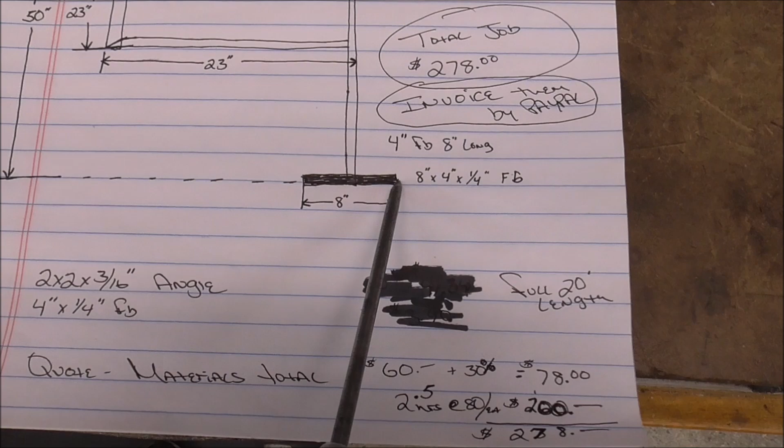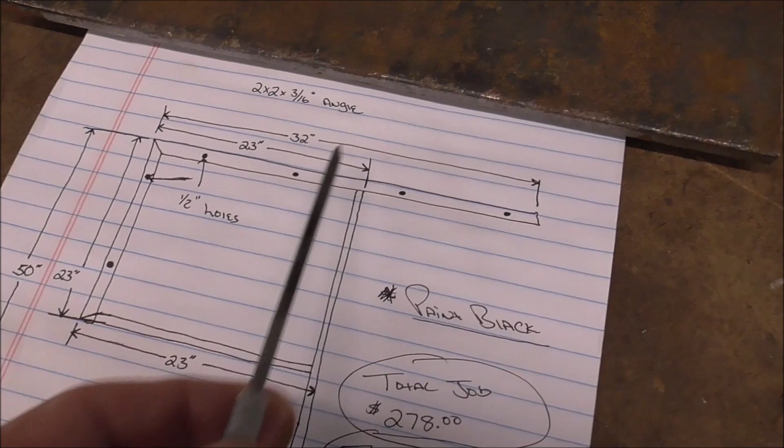So I ended up picking up a drop. We're going to end up plasma cutting this into a piece of 4x8 flat bar. And we're also going to have to bore some 1/2-inch holes along this and along this leg here, because this bracket is getting bolted to a block wall as well as this. Then when we're all done, we're going to just spray it with a coat of black paint.

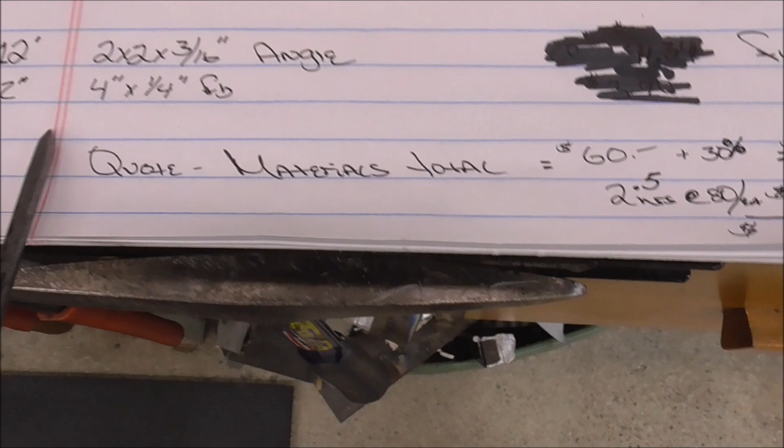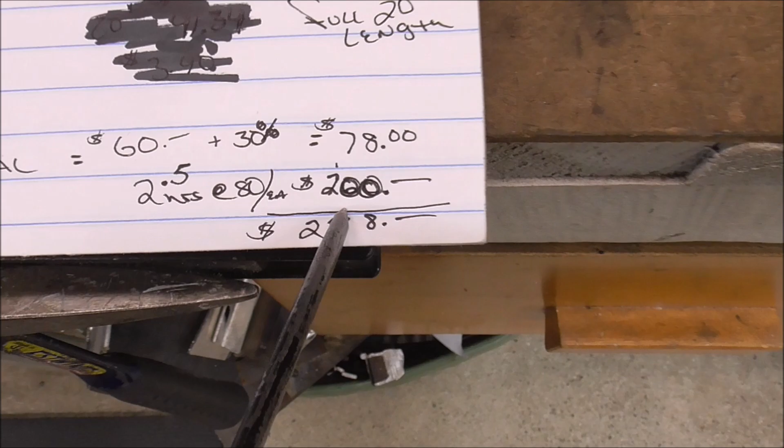Here's the breakdown, here's the quote of materials. Materials cost me $60. I marked them up 30% because I went and picked them up, so the material total was $78. I've got 2.5 hours of labor at $80 an hour, that's $200 in labor. Total project, $278.

And I made a note: my customer asked if I have PayPal, which I do, and I will invoice them through PayPal.

I love to share the inner working parts of the business aspect end of it for you guys, because it gives you guys an idea of maybe what you can charge, because a lot of you watching this may be considering picking up side jobs or maybe even starting your own business. A pretty typical MIG welding labor rate for a self-employed person in our area would be about $80 an hour.

That's a reasonable charge for the market for the area that I'm in. I charge $80 an hour labor for just general welding and fabrication. Other things cost more, like if I'm doing something specialty for someone, like repairing cast iron, or TIG welding, that costs more because it's more intricate, more involved, more tedious work. But for general welding and general fabrication, I charge $80 an hour.

I also have a labor rate that I charge by the inch for weld and per cut. That comes into play at different times. Continue to watch this channel and you'll see when I incorporate those strategies in. But this is just some basic fabrication, pretty simple. We'll be able to bust this out pretty quick and get this customer back in business.

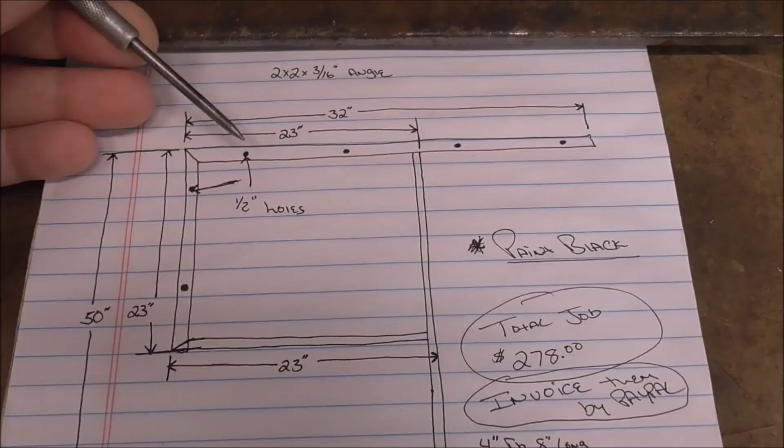So the first thing I'm going to do is start getting my cut list together of the things that I need to cut. I'm also going to have some 1/2-inch holes, 4 of them, in this leg, which is a 32-inch leg. I need to drill my holes. It's going to make things a lot easier if I drill my holes before I start welding this frame up.

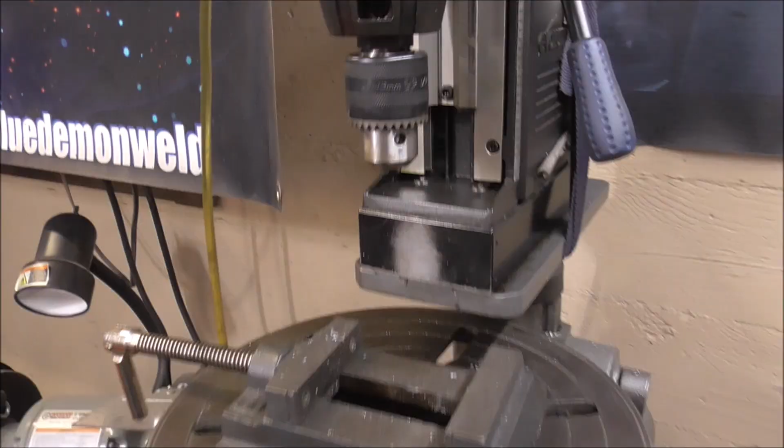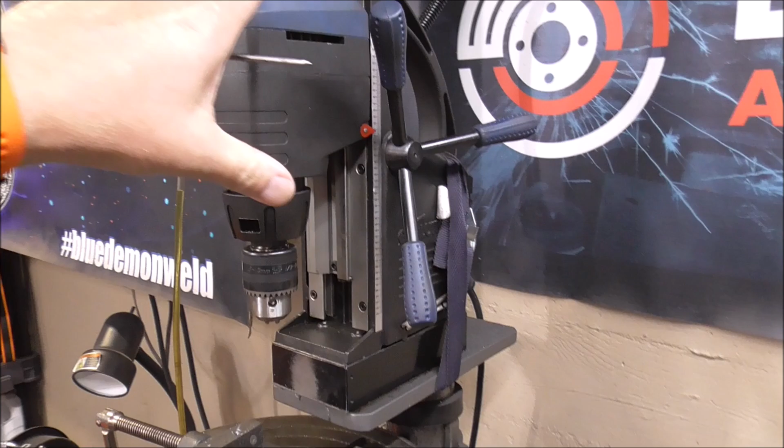And to drill these holes, I'm going to be doing this on my mag drill that I built. If you guys haven't seen this build, it's awesome. I picked this whole base up. Everything you see here in this stand, which is all adjustable through this crank, I paid $35 for this because it actually had a regular drill head on the top of it, but the motor was blown and everything was all clapped out and super loose.

So what I ended up doing is modifying this column and welding this steel plate to it. Now I just take my mag drill, set that on there, and turn on the magnet on the back. It magnetizes itself to this, and now I've got an adjustable drill press stand, and when I don't want to use it as a drill press, I can just carry it to the job site and use it like a regular mag drill. So I get double duty use out of this tool, so it's awesome.

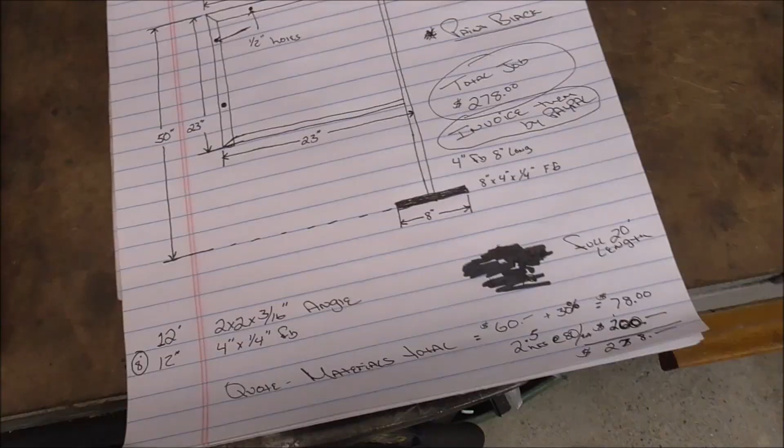I've got a set of annular cutters that I use with this, and it just makes hole drilling so much easier. It goes super fast. So what I'm going to do is I'm going to start cutting some of the pieces up.

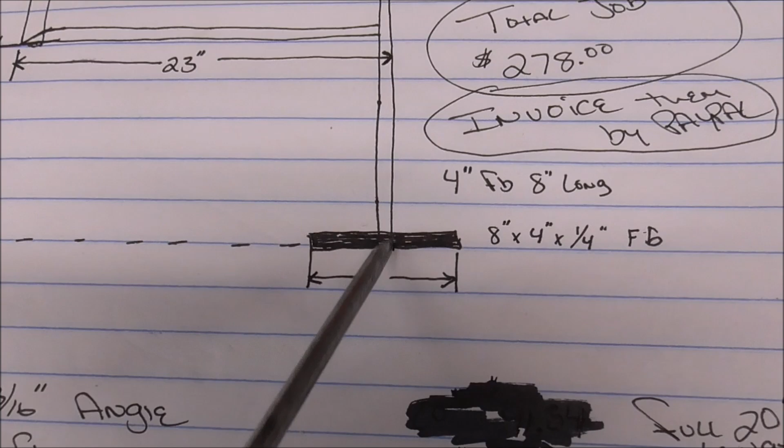Now if you look at these measurements, you can see I got a 50-inch piece. That is from the outside edge of this angle to the face of this plate. So this piece of angle right here really isn't 50 inches long, it's 50 to the plate. So I got to subtract the plate thickness, 1/4 inch there, then I've got to subtract the 3/16 thickness of the angle on this side.

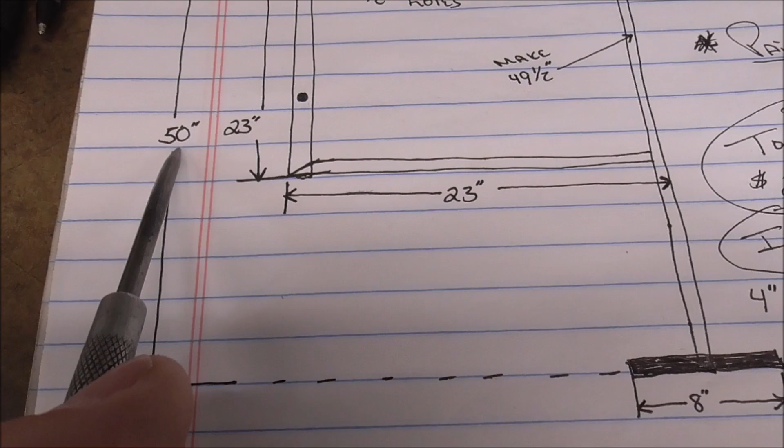So we're going to be subtracting 3/16 plus 1/4, and that'll be the length of this angle. This piece right here that's marked as 50 inches long to the face, I actually need to make that piece 49.5 inches long so that it finishes out to 50 inches when I'm done.

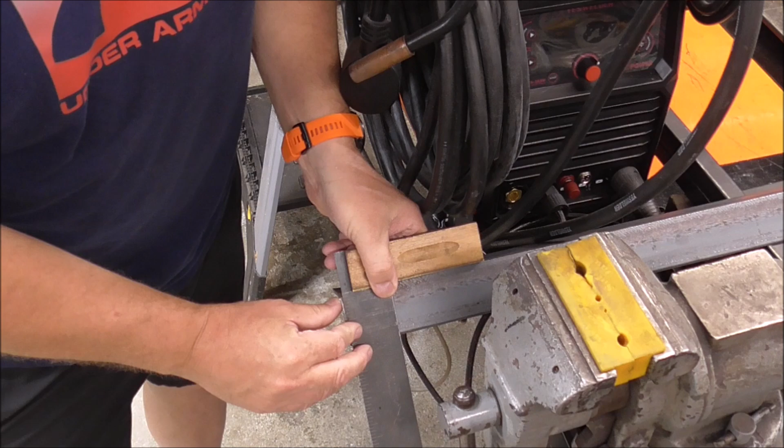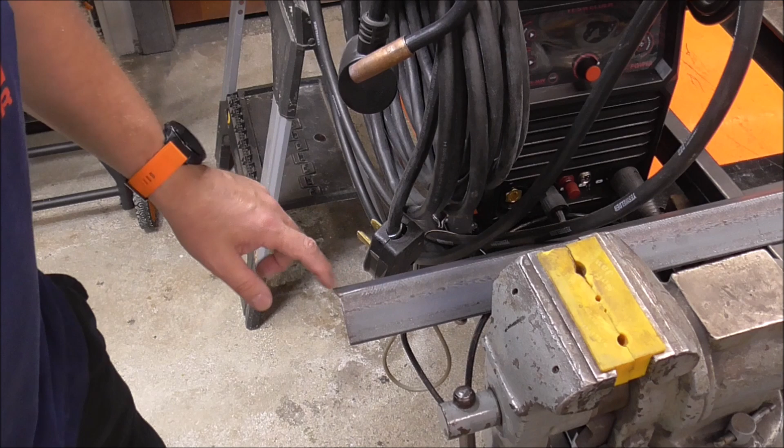One of the first things I like to do, guys, is check and verify to make sure that the side I'm going to keep, that the cut from the factory is actually straight, and it is, because there'll be times when it's not, and if this isn't straight, it's going to mess up your overall measurement. So if this is the piece you're going to keep, you should always get into the habit of checking to make sure that cut is straight. Just don't take it for granted that it is.

So I'll get a nice crisp mark on here, and we can get this cut at 49.5.

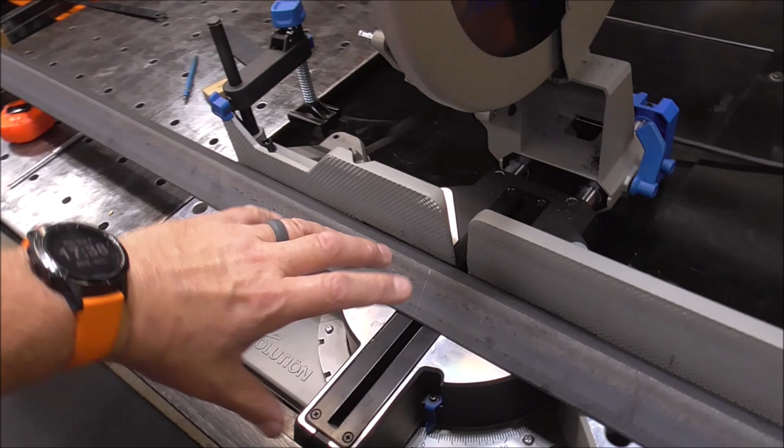This saw is going to be the perfect tool for cutting these pieces. This is the Evolution 355 MCS, and it is a chop saw that cuts both ways up to like 47 degrees. This thing is awesome, and we're going to need that feature for this because we're going to be picture framing the corners on this angle.

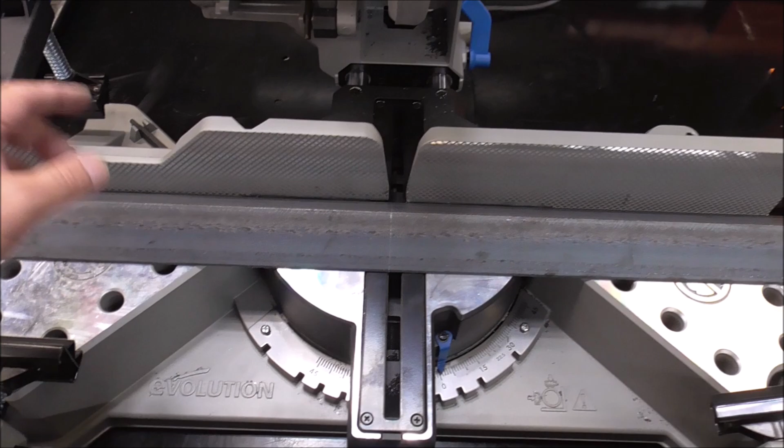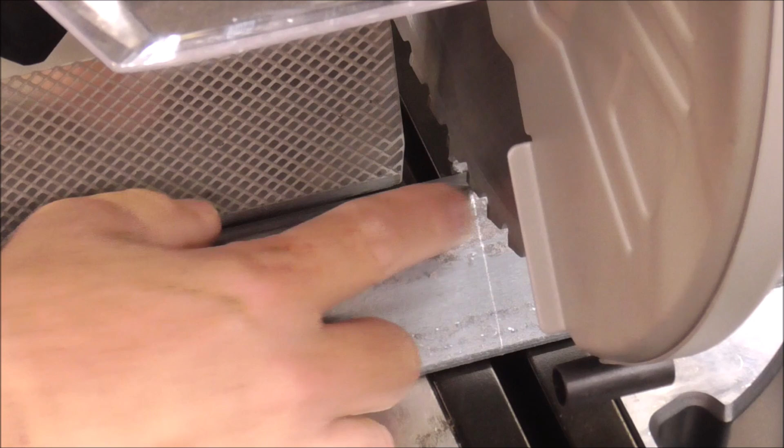What I mean by picture framing is these corners are going to be mitered here and here. So this is the side we're keeping, this is the scrap. I need to set my saw blade up accordingly, and make sure the saw is cutting the blade to the right side of the line and not this side, because this is the side I want to keep. That's the scrap.

These saws are loud, so you want to make sure you've got hearing protection and eye protection.

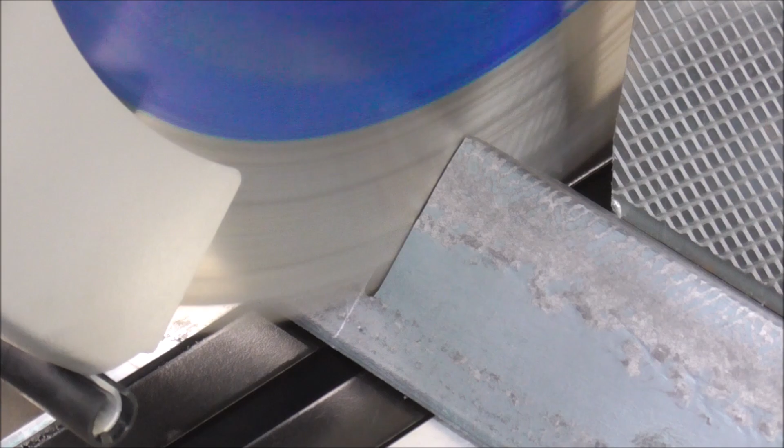49.5. Perfect. We just finished cutting this piece.

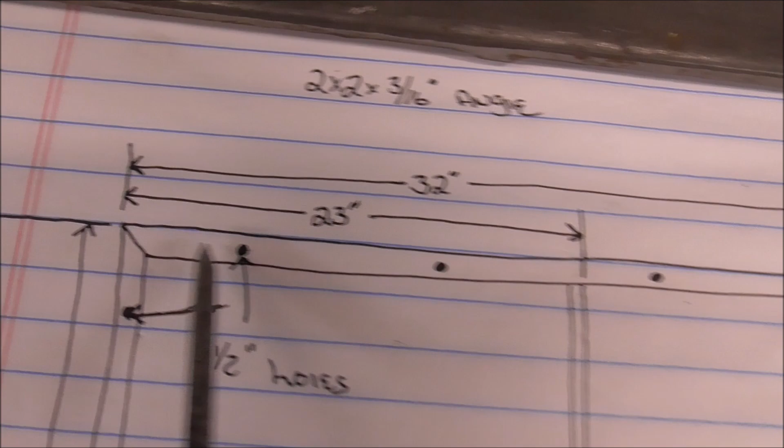Now the next piece we're going to cut is this one right here, which is 32 inches long. And that's 32 inches from the outside point of that miter to the end. So we're going to cut the miter first, then we'll make it 32 inches long.

And that's what's so great about this saw. You just loosen this up, turn your saw to 45 degrees, and it locks right in positively right there. We'll put the stop down on the material just like this, lock it down, put another one here to lock it positively against the fence. And there we go.

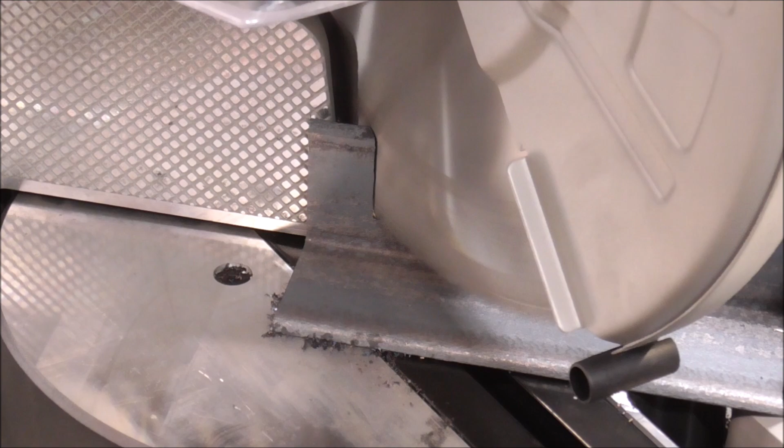Now if you just want to check to verify that that is spot on, you just take a framing square. Boom, look at that. Perfect 45.

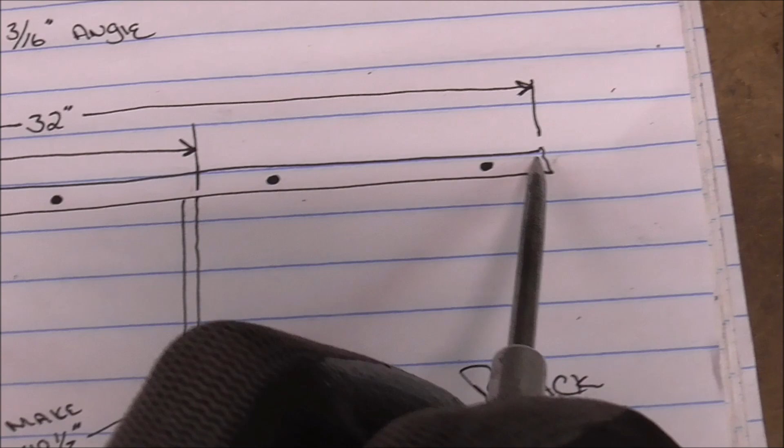We said we needed to make this piece 32 inches long to that long point right there. So here's the long point right here. We just need to measure back 32 inches.

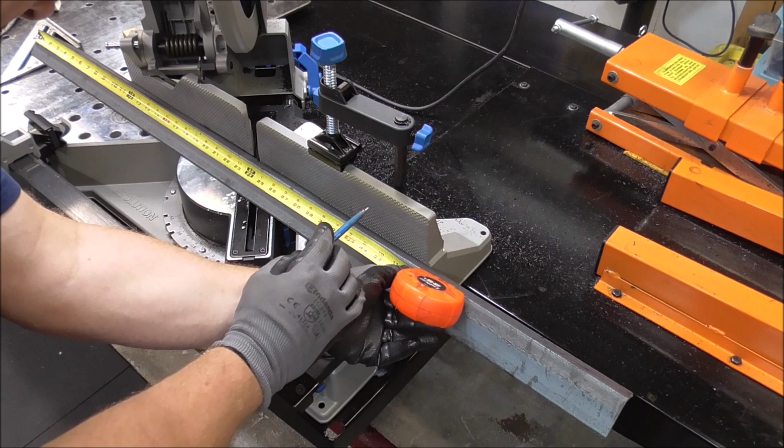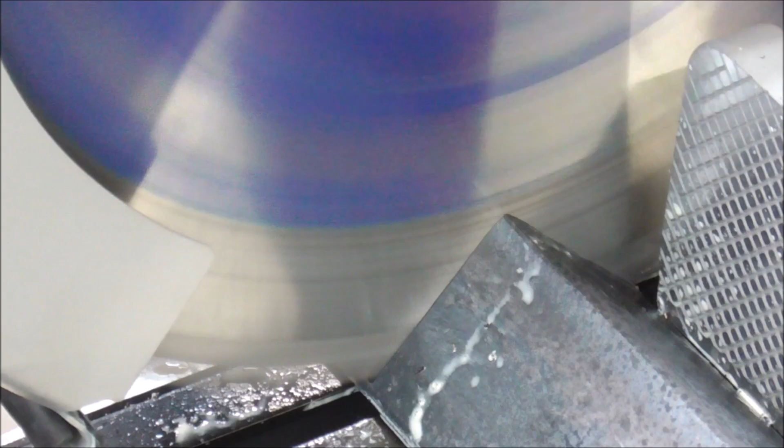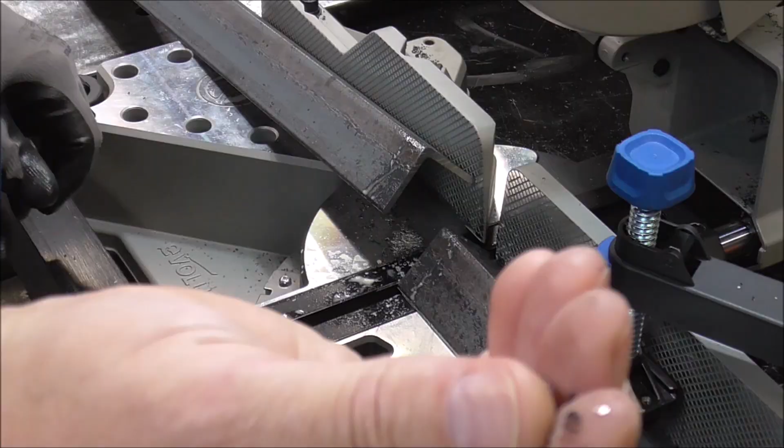And the great thing about this, guys, is that this cut has no heat in it. It's burr free, super clean and accurate, and it doesn't leave sparks all through your shop that can burn your shop down like a regular abrasive wheel can. These are the chips that it creates, just little small pieces of metal.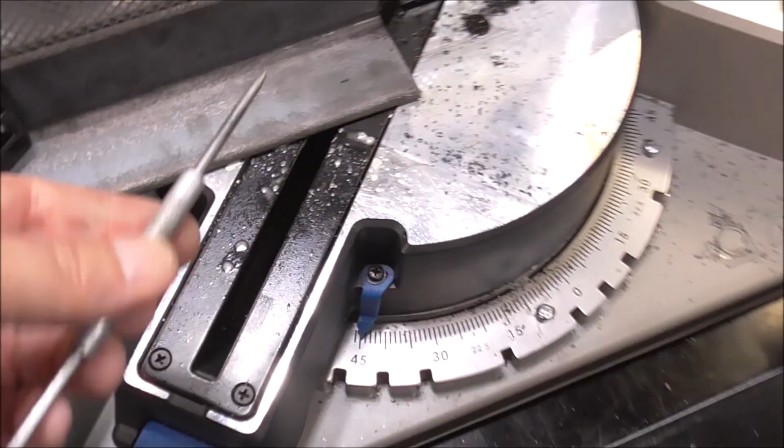The next piece I gotta cut is this one right here. This is gonna have a mitered cut here and a mitered cut here. So now we've got our saw set this way so we can make a miter in this direction. Then we'll measure back 23 inches and do a miter in the other direction.

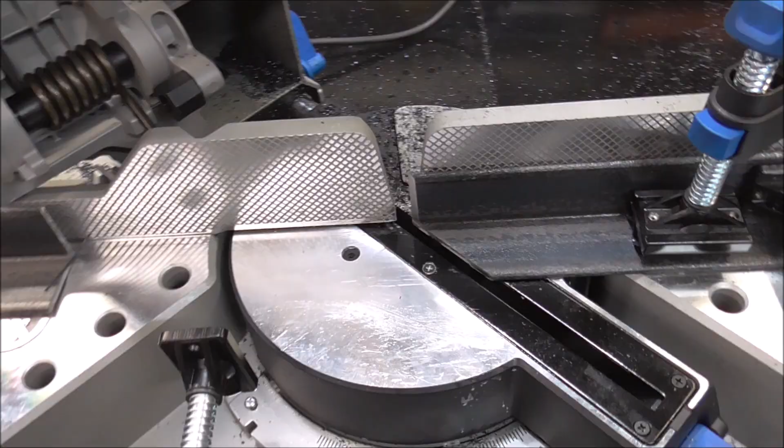I had a little issue here with this part of the saw contacting the height of this angle, so I had to cut it off at 23 inches and then make the 45 cut, but that wasn't a big deal. Like I said, that's resolved if you just cut it off square, then make your 45.

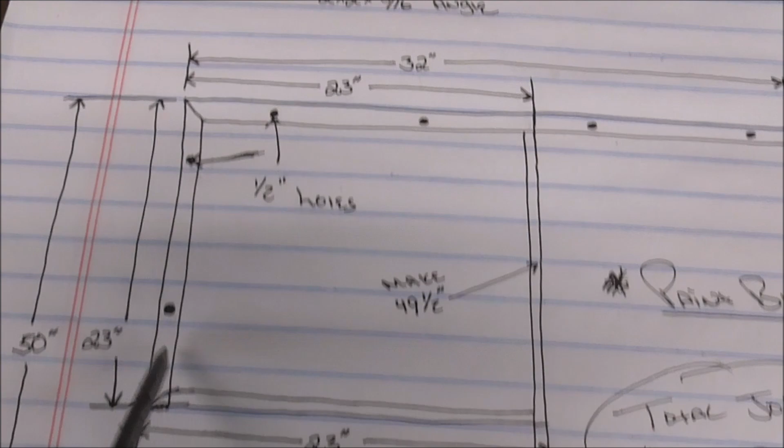From the outside edge of this angle to the outside edge of this frame, you can see that's 23 inches, outside to outside. So outside to outside needs to be 23 inches as well on this side. That means we've got to make this 3/16 of an inch shorter because that's the thickness of this angle. So it's going to be 22 and 13/16.

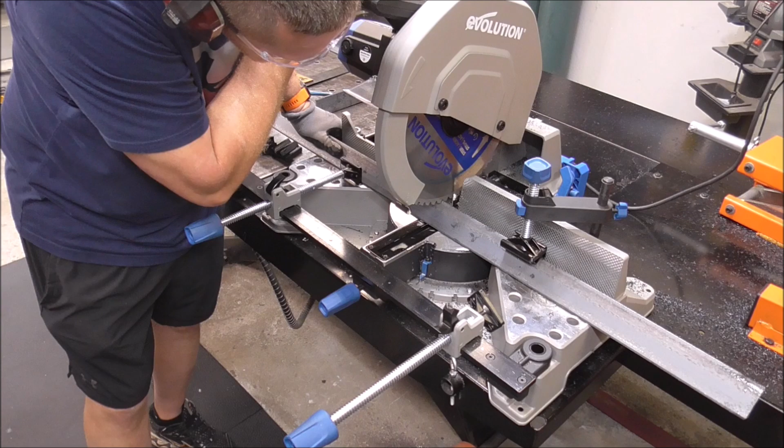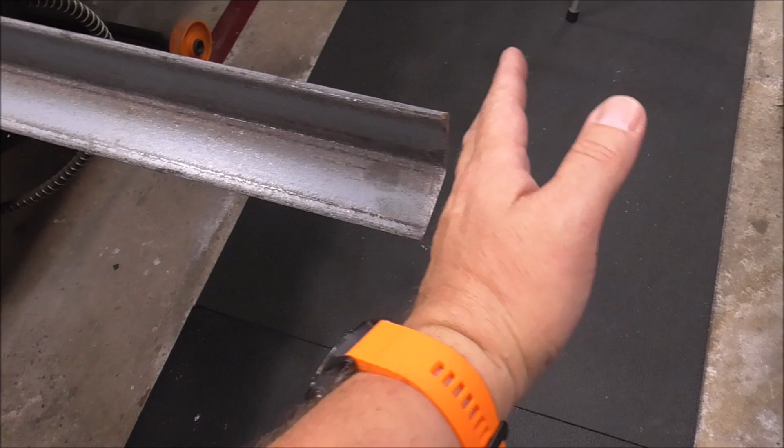So the rough shape is all made now. This is where the plate is going to be on the end, the 4-inch flat bar. But now we've got to do some coping cuts.

We've got to cope out this, you can see right there, so that this sits flat right here. That means we've got to take out this piece of the web here, and come up 3/16 and across this right here so that it sits flush. And we've got to do the same thing on this side over here.

And we can do this with the bandsaw. I think that's probably going to give us the cleanest cut. And that's as simple as just butting that up there and putting a line right on the metal. Right there, so I just put a straight edge on it.

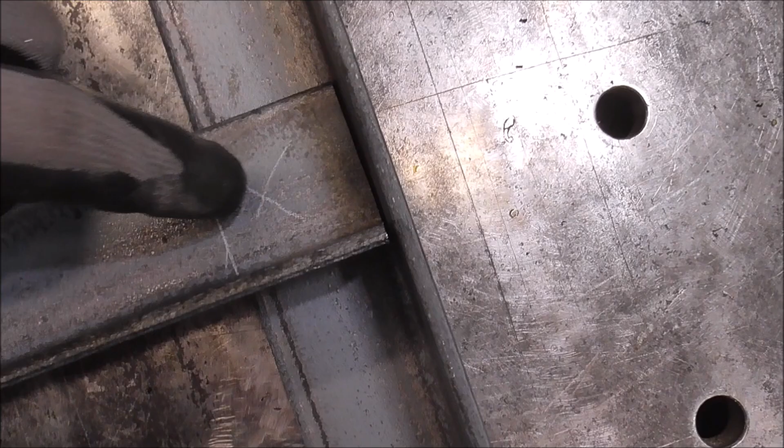So that's what we got to cut out, right where that X is. And then we got to cut across there a little bit. Piece of cake. So to cut along this, which is 3/16, we're just going to turn this up on edge.

Just like this, and cut to the end of that line. Now I'm using my portable bandsaw stand that I made for this saw. Super easy. If you have a portable bandsaw, you really should invest in building one of these stands because you will get so much more use out of your portable bandsaw. I use this all the time.

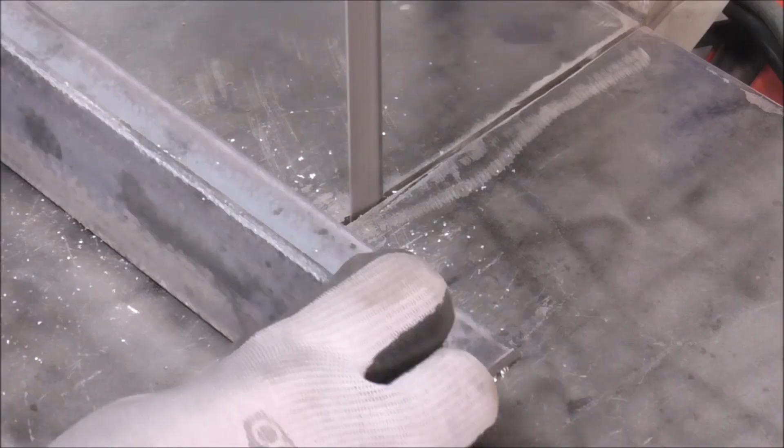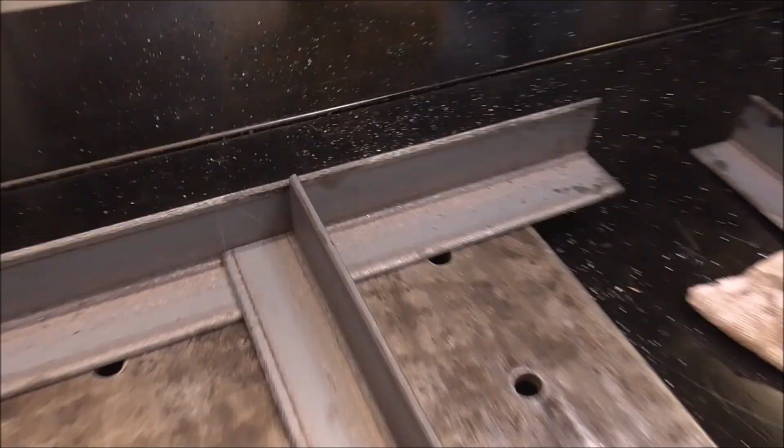And that's a coped cut right there. You can see how nice that fits now, all around there, all around there. Gives me a lot of area to weld, like all along there, all along there, all up there. Same thing on this side, here, over, and I could even bevel it out and do the bottom side as well.

So now we just gotta cope out this joint here. Just put a little mark right about there. Carry that across and cope that joint out.

I've laid this out all along the length and made marks fairly equal distance that'll work out good for drilling the holes to secure this to the wall. I've center punched this one right here so that I could bolt my drill vise to this table, and then I can just slide it along the length of it and it'll put the holes perfectly in alignment.

This is a 1/4 inch bit. This is going to be for my pilot, and then we're going to go with a 1/2 inch. I thought I had a 1/2 inch annular cutter. The smallest annular cutter I have is 9/16.

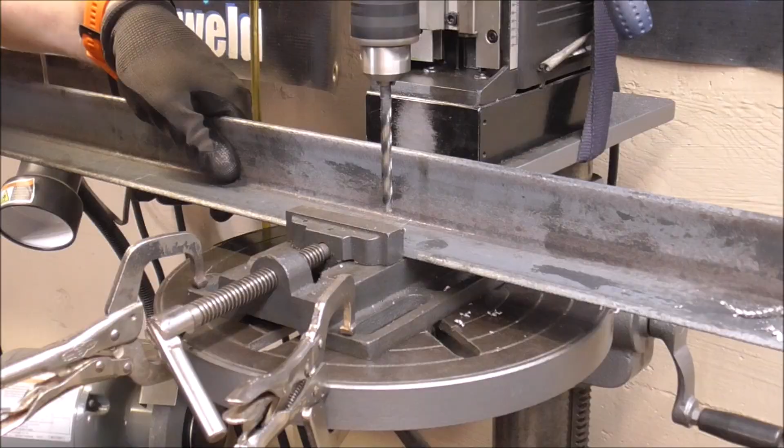Now I've got a 1/2 inch drill bit chucked up, and we'll just drill down through our pilot hole that we just previously drilled.

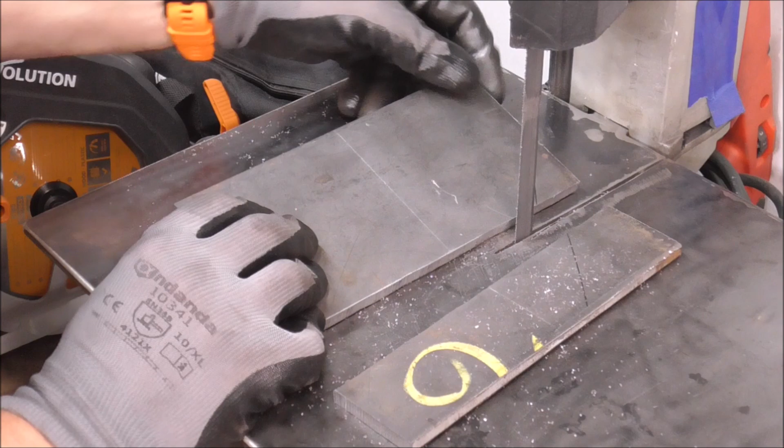I was going to use a plasma cutter, but I figured rather than set up a brand new tool, this is right here, might as well use this. So now this is 4 inches by 8 inches, all set to go.

Now I'm going to work on my joint prep. So wherever there's a weld to be made, I'm going to bevel it back, get everything all cleaned up, get all the mill scale off it, so we got a nice, good, solid connection.

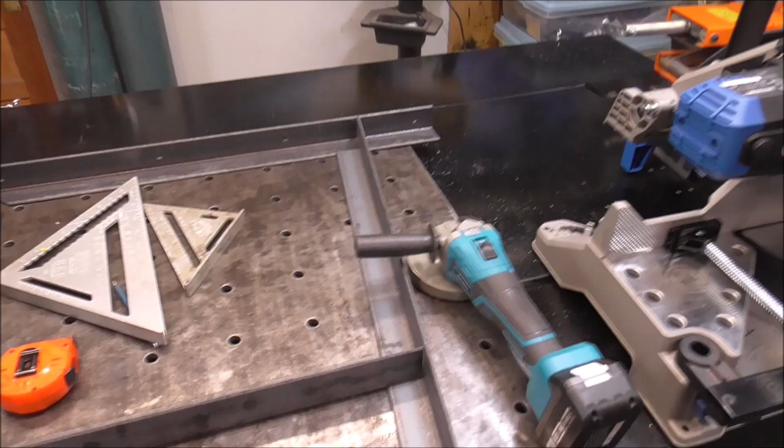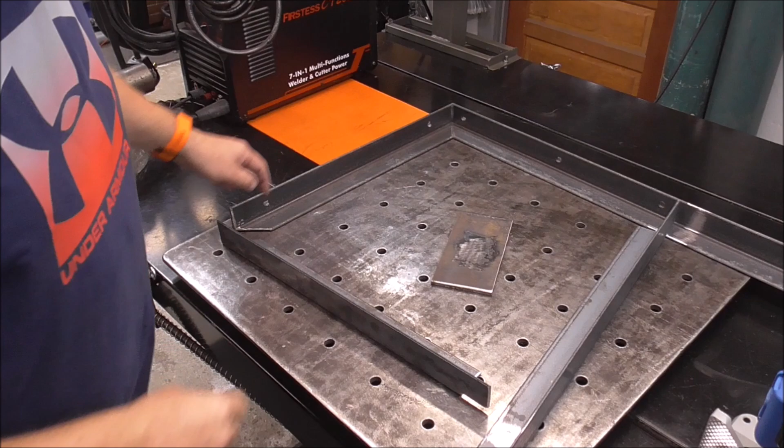Now that I've got all the edges prepped, guys, you can just see kind of here what I've done. I've kind of beveled everything, cleaned it up, got rid of the mill scale.

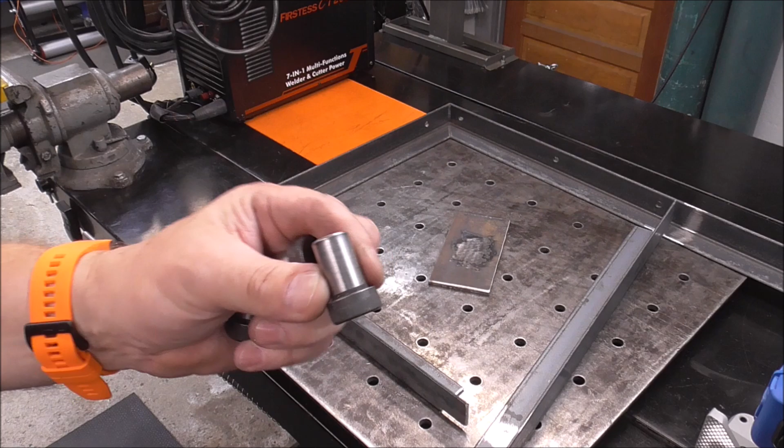Now I can start fixturing all this up, and it makes it really easy with this table. I built this fabrication table. These are some shoulder bolts that help align everything and make everything square.

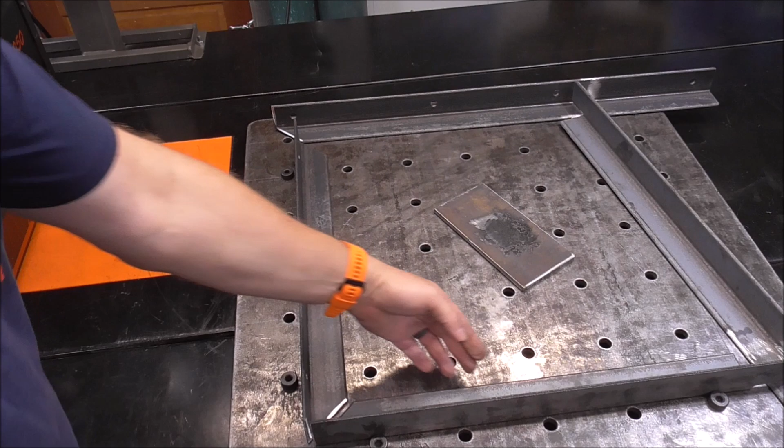So all I do for this is just drop some of these pins down inside the table. So that makes a straight edge here. Do the same thing over on this side. They fit really tight down in these holes like this. And now with this pushed up against these, this pushed up against these, that makes for a perfect 90-degree corner.

I just clamp this down, tack this up, and then go all the way around, make a complete square, and then this is perfectly level, flat, and square. It just makes layout and setup so easy. Then just throw a couple clamps on it. Also, I made these as well.

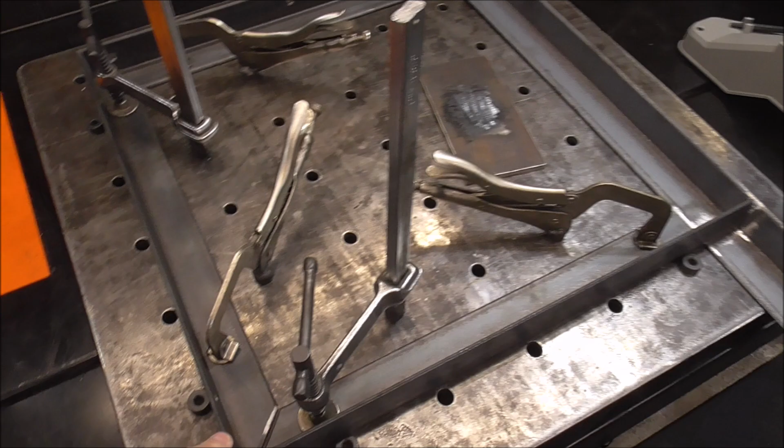The next thing we want to do is start welding this out. Now, if I was outside or on a job site, the perfect process for this would be to stick weld it. We're not on a job site, we're inside in a controlled environment, so that makes this a perfect job for MIG welding with C25 gas.

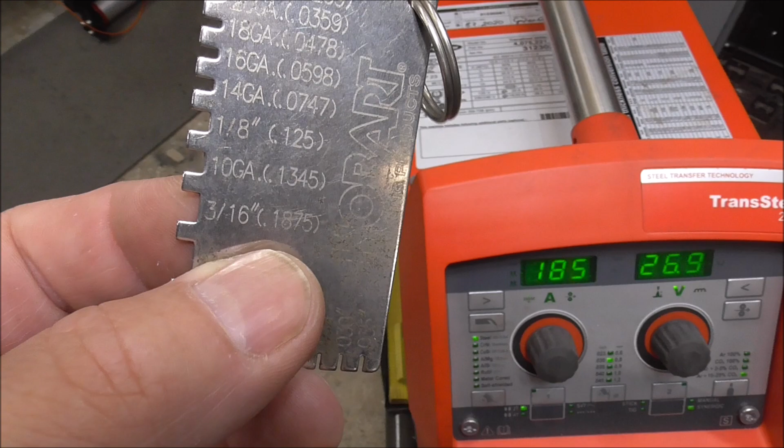I'll take a minute to go over the setup. I'm using my Fronius Transsteel 2200. For wire, I'm using Lincoln 30 thousandths. I'm using C25 gas. So if we look at our material thickness gauge here, it says that 3/16 material is 0.187 thousandths. So we go to our machine and we're set on material thickness.

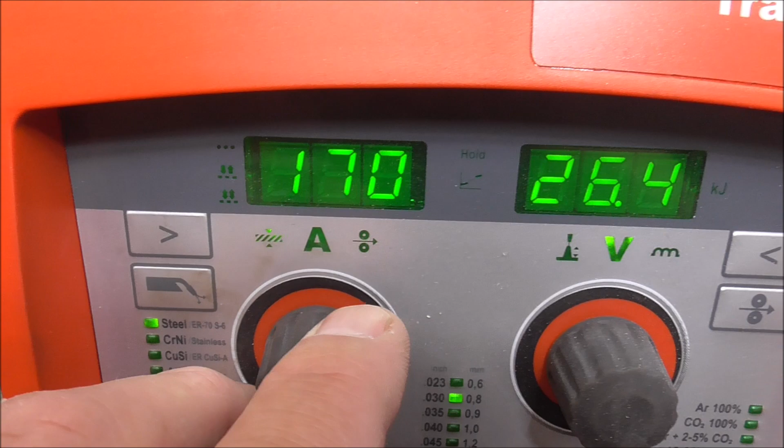So we can go to 185. The next one up is 190. So we'll go 185. We're on steel. We can purge out the line and also see what we're running for CFH.

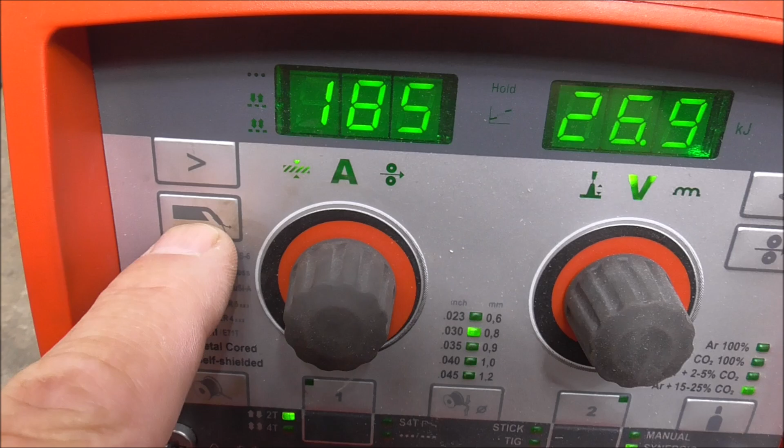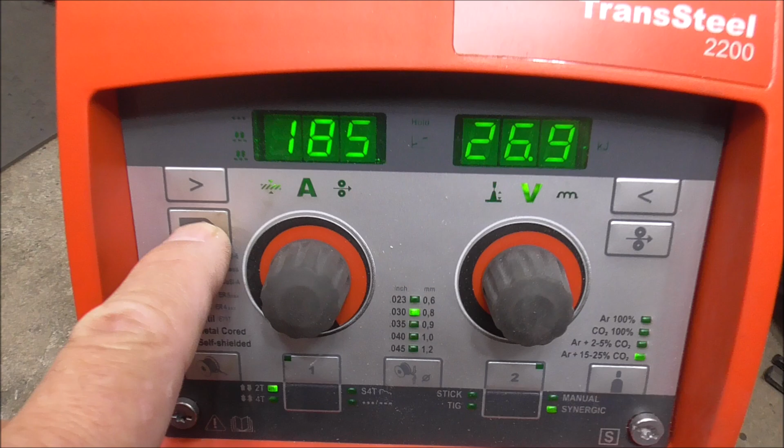So that purges out the gas in the whip, and that lets me know I'm running about 18 CFH. Press it again, that turns it off. You can see we're set for 30 thousandths, C25 gas, and that works out to be 26.9 volts. So we're all set up with this machine to start welding.

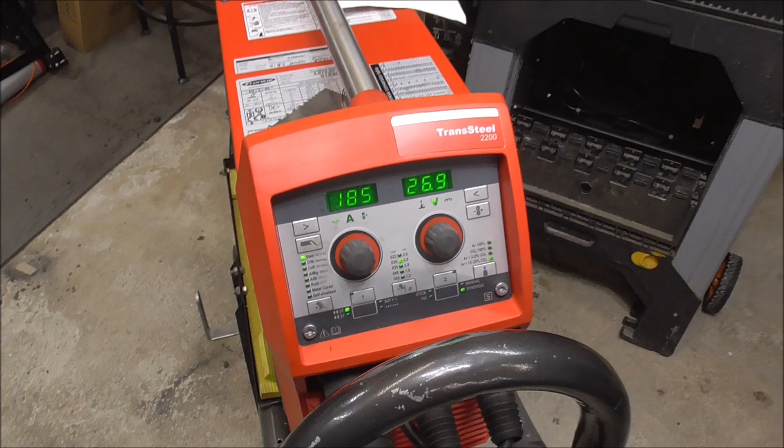I went up to 27 volts, guys, just because it felt a little cool.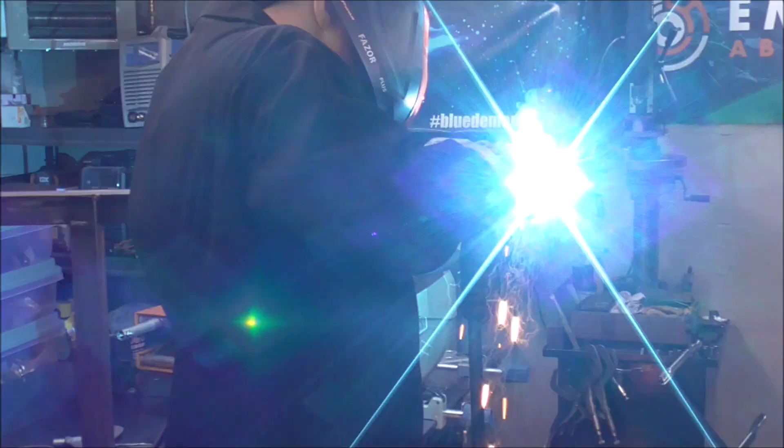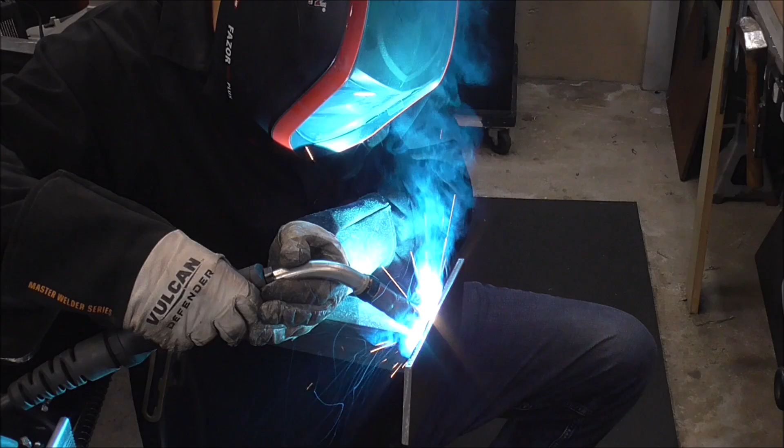Because there's very little surface area around this, I took this corner where I started and wrapped it around this way, and where I started here, I started a little bit beyond the corner. You see how I did that? And wrapped it around this way, so that there's no break inside the corner.

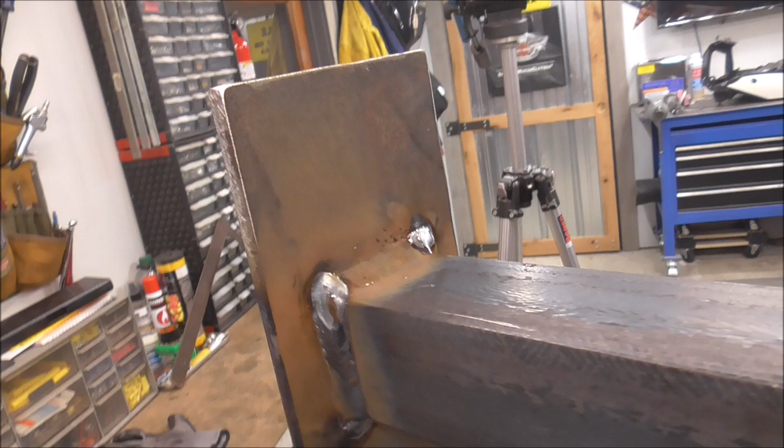There it is, guys. Just got to clean it up with a wire wheel, and then we'll throw a coat of black paint on this and we'll get it off to the customer.

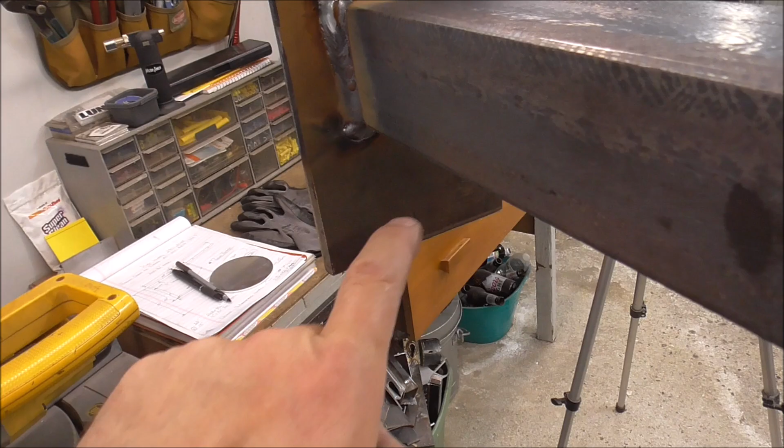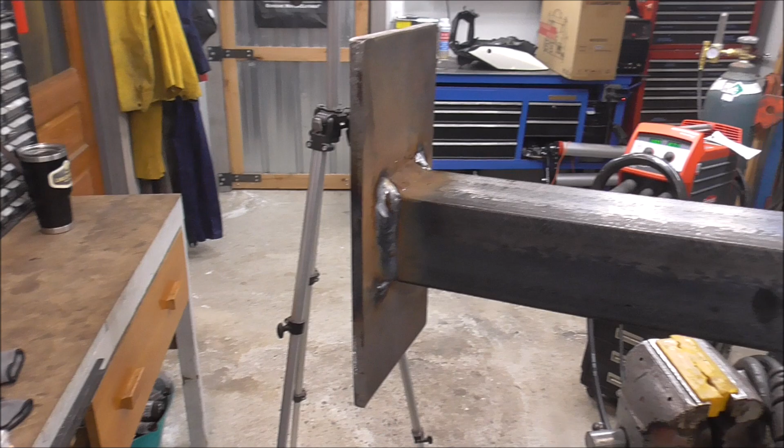I asked if they wanted me to put any holes in this plate over here, and they said they didn't know at the time how they wanted the whole layout to be, so they said they'll drill it in place. But I did ask before I installed this, because the time to drill the holes would have been right before it's welded on. That way you could drill them on the drill press.

Now I'm going to give it a good wipe down with some paint thinner. Then we're going to brush on some nice black paint to help protect the finish.

I just lightly wire wheeled everything as well, guys. Just kind of went over it in places with a flap disc and wire wheel to take off any debris or BBs or anything left on it. Kind of take your hand and run it over it. I'm just going over it with some Rust-Oleum paint.

Now, because this is going to be some type of hoist, guys, you want to protect yourself and let your customer know and make it aware that any brackets or anything used to lift materials or people need to be signed off by a structural engineer, because you're not a structural engineer.

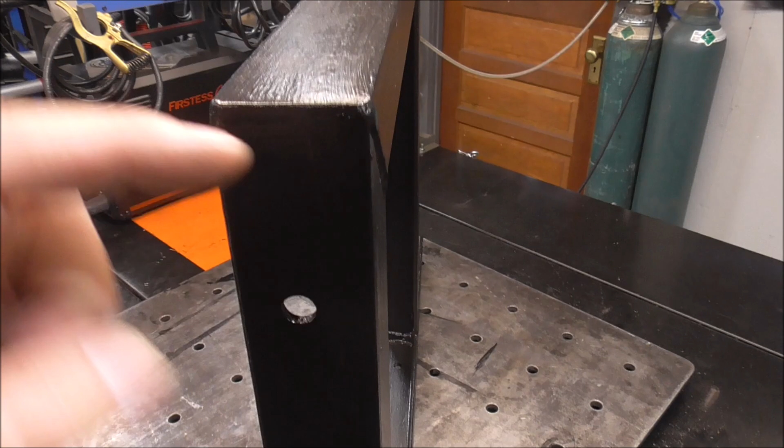This is going to be against a wall, and out here this weld was ground, and that one was ground on the outside to give a good appearance and so that it fits flush. This part is going to be exposed on the bottom part from what I understand. And yeah, it's all painted up, all looking good. We'll let this dry and get this back to the customer.

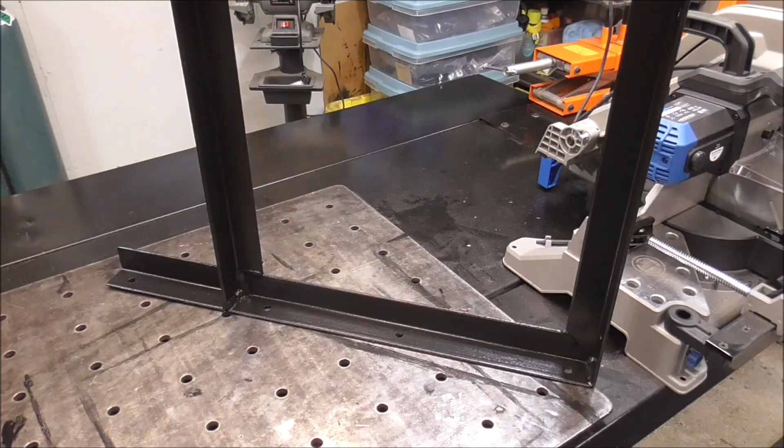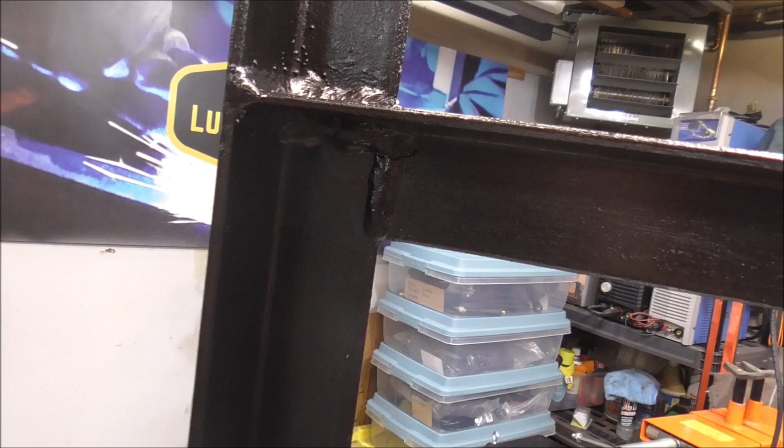Anytime you're building something like this that could be used to hoist either materials or people, you don't know what they're doing with it. On the invoice, I will actually write that I am not a certified engineer, and that this bracket be certified and signed off by an engineer. That way that'll protect you as far as any liability if they go to use this and they're hauling people with it.

And the person that designed this, it wasn't me. I didn't come up with this design. I'm just building what they told me to build. And if the person who designed this isn't a certified engineer and something happens and someone gets hurt, that's going to be liability on you. So always make sure you have stuff in writing.

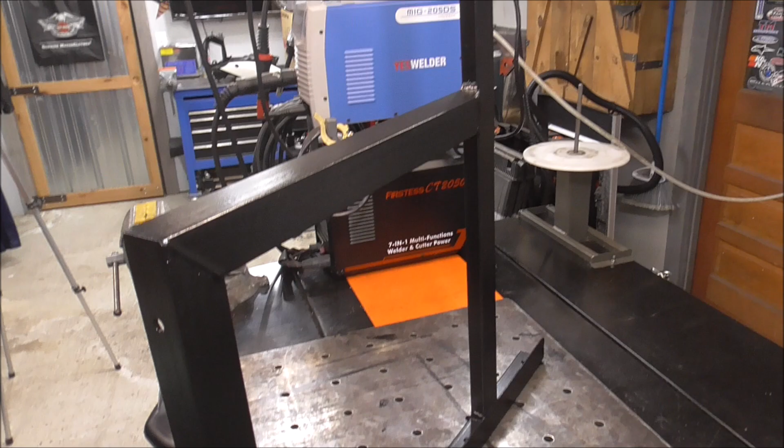That's probably the biggest piece of advice I can give you, is have stuff in writing and be very clear when you're doing something and what your intentions are, so that your customer fully understands that if they're going to do something with this bracket that could hold people, and if the bracket fails, that it's not on you.

And that's not to say that you'll never get sued, because there are actually people who literally go around looking for lawsuits and slip and falls. Someone who will drive down the road and lock their brakes up intentionally so that you rear end them so they can get a paycheck. So there's always somebody out there looking for a scam or to make a quick buck. All we can do is try to protect ourselves best we can.

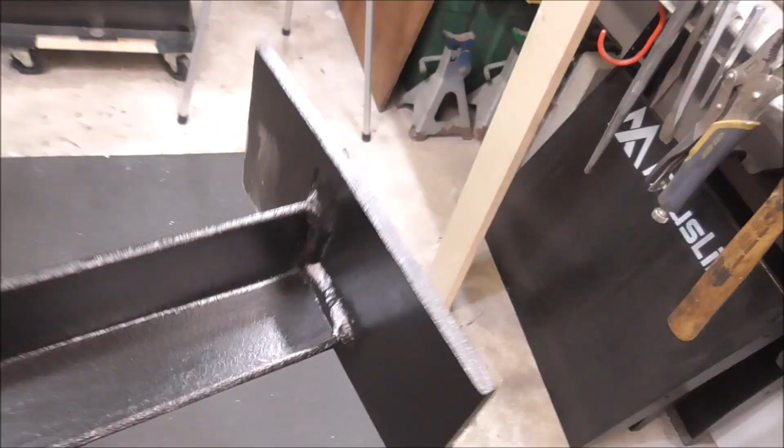Another thing you're going to want to do, guys, is look into forming an LLC if you're going to get into some part-time work or even full-time work. An LLC is a limited liability company. That'll help protect you and your assets.

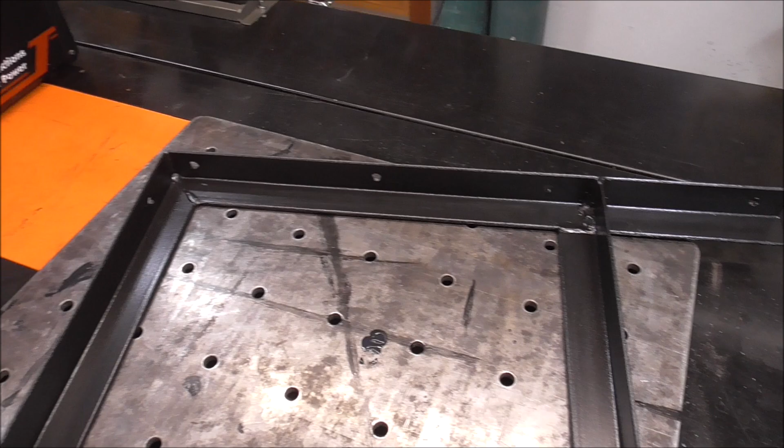Another thing you may want to look into is trademarking, because people like to steal from me and use my logos and represent my original artwork as their own. I've had to go out and trademark my stuff, and trademarking is going to cost you at least $1,000 to do it. But that way, when somebody wants to go out and portray themselves as you, you can legally go after them and financially go after them for compensation for damages they're causing you by representing themselves as you and making a profit off of you and your original artwork, or your brand.

Get yourself an attorney, someone local to you that specializes in that stuff, and they'll walk you through it. To form an LLC and trademark some of your stuff, it's going to cost you a few thousand dollars, but it's well worth it in the end if you're not losing all your assets and everything you worked hard for because some creep went out looking for a payday and sued you. That's all there is to it, guys.